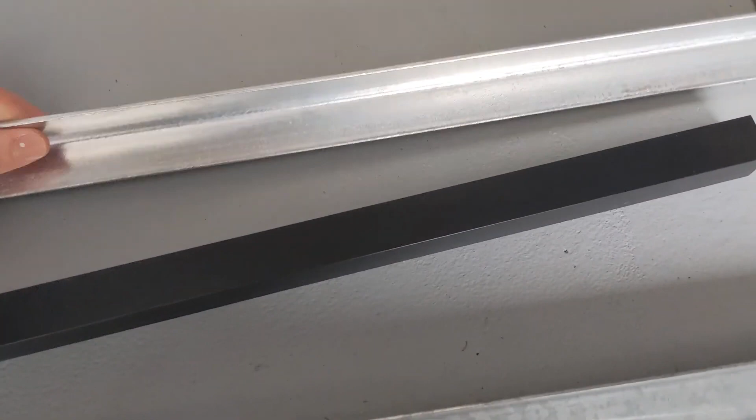So to mount this alley tube to the desk, I've got some angle iron. I was going to weld this, cut it up into little tabs and weld on 2 tabs on each side. But to make it available to more people, I'm going to try to rivet it on and see if that works. I think that should hold enough because it's really not holding that much weight. So more of you guys at home can make this without having all these different tools.

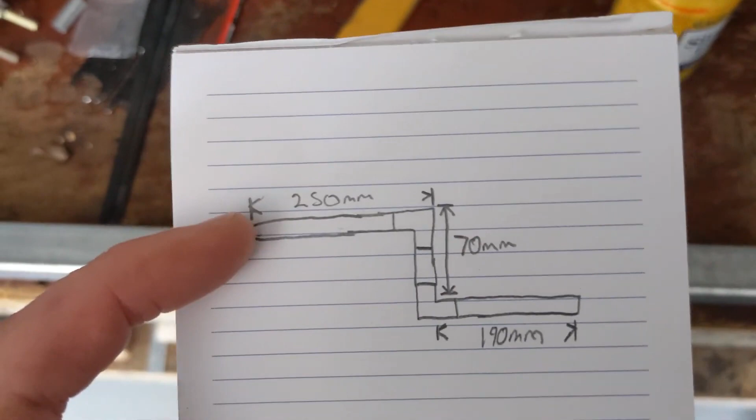So let's start cutting. All right, so here is the design. It's going to come out 250mm total. So we've got to be aware that this is not the length that we're going to cut the pieces of aluminium, because the angle is going to also have length involved.

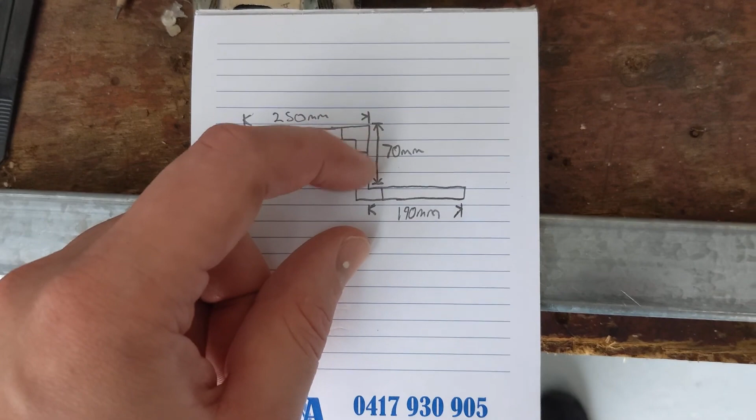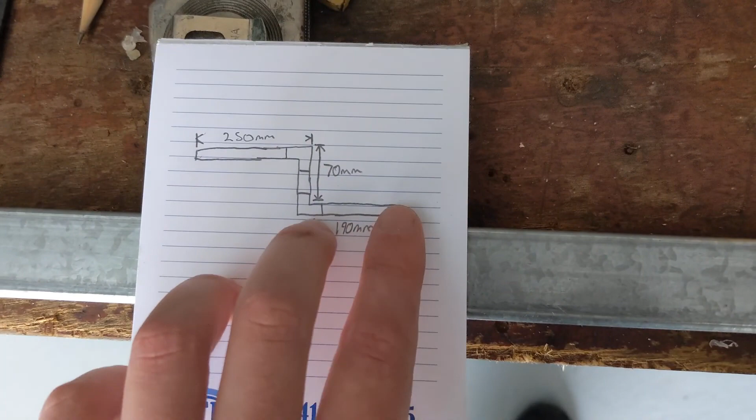Then from basically the bottom of the table to where the joystick is going to mount, I want 70mm of drop there. I think that's quite nice for me. I can always adjust this later, but for now, this is going to be fine. And then 190mm out, which is the perfect width or depth of the joystick. So there's not going to be any little bit of alley hanging out that's going to cut me on my leg. And I'll make a nice little end cap with my 3D printer to just chuck in the end there so it's not going to scratch me.

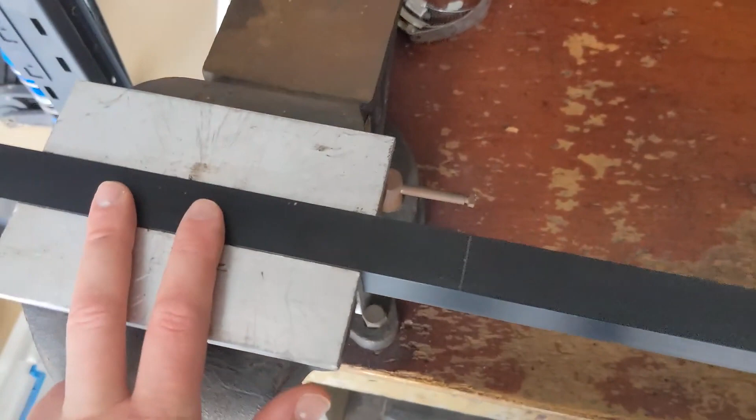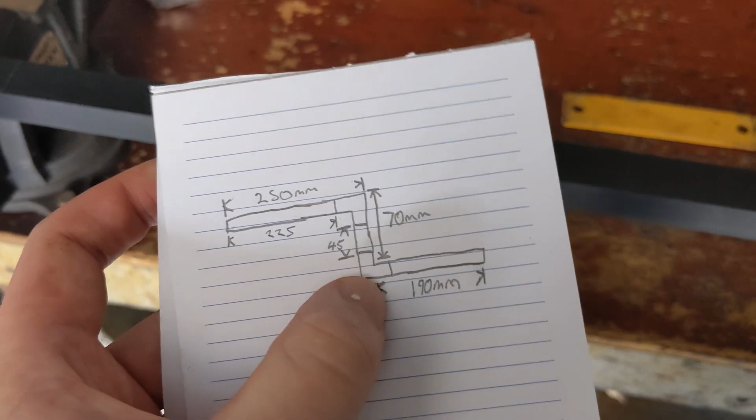So let's clean this bloody desk up because she's filthy, and let's get cracking. Alrighty, so desk is cleanish. Clean enough anyway. And we got the alley clamped in the soft jaws here, so we don't mark anything. Got our first cut marked out, so for everyone playing at home, you can see the actual lengths we're going to be cutting the alley to. So this one's 225 because the corner piece is 25mm long, so we have to take that into account. The other piece will be 45 long, and the lower piece will be the full 190 because these pieces offer the full length of tube, as you can see. So let's get cutting and I'll show you the end result for the alley piece.

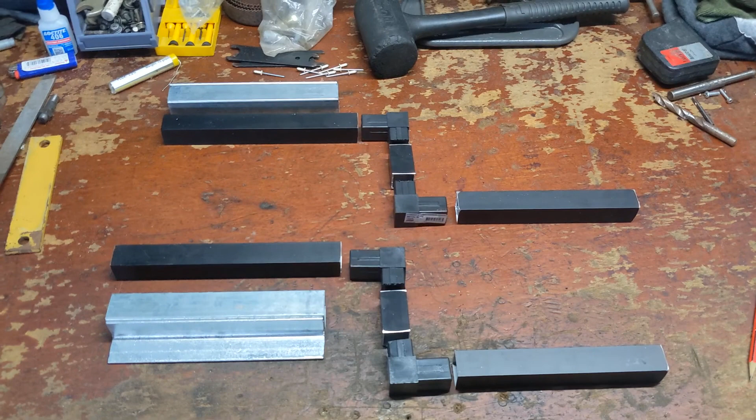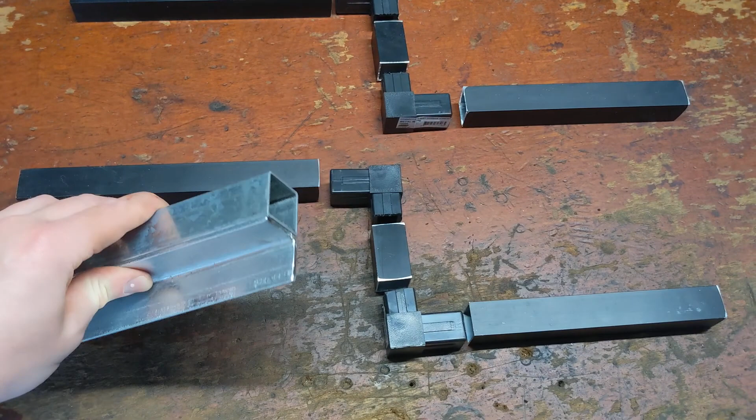Alright, so all my pieces are cut now. I cut all the aluminium with the hacksaw because I don't have a blade to cut aluminium. You can't cut aluminium with a steel type blade. And then I cut these with the drop saw. So these will be the bench mounts. Don't mind my little blood on there. So that will get riveted together, and that's going to bolt underneath the bench. Same goes for the other side.

These are the tubes that are going to slip inside. I think I will actually drill a hole and tack a nut on there and put just a little bolt so it doesn't slip and slide out, but I'll test it and try not to do that because it's just one more thing I got to do. And then for these little angles, I had to cut them down a little bit because this piece is only 45 long, so it's a little bit too short for them to be full length, as you could see. So now I will hammer it all together and show you the test fit.

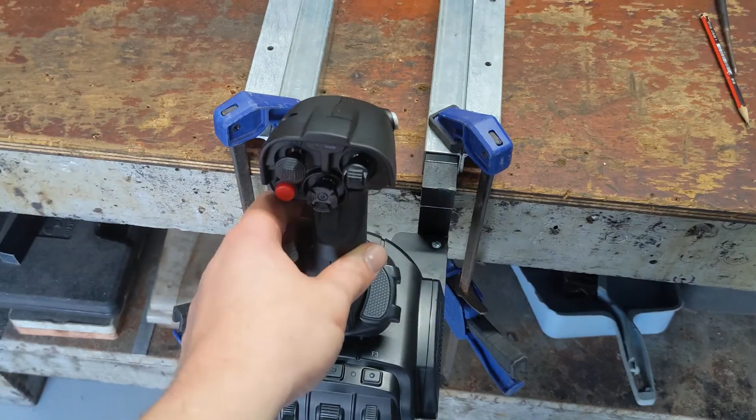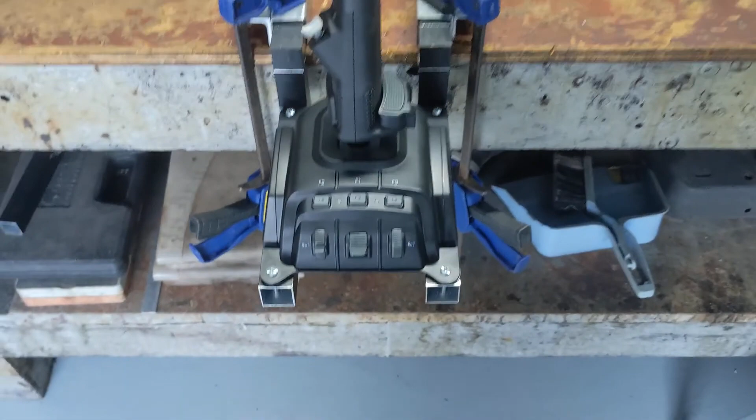Okie dokie, so it is all ready to mount up. So I've just got it clamped to the bench, as you can see. And it's working mint. No movement at all. I thought there would be a little bit of flex, but it's actually solid as a rock, so very, very good. So I'll just 3D print some little end caps to block off here so it doesn't look tacky. And overall, I think it's quite nice.

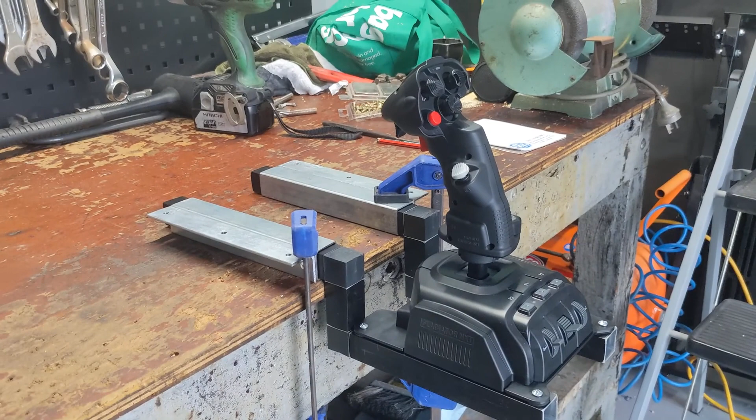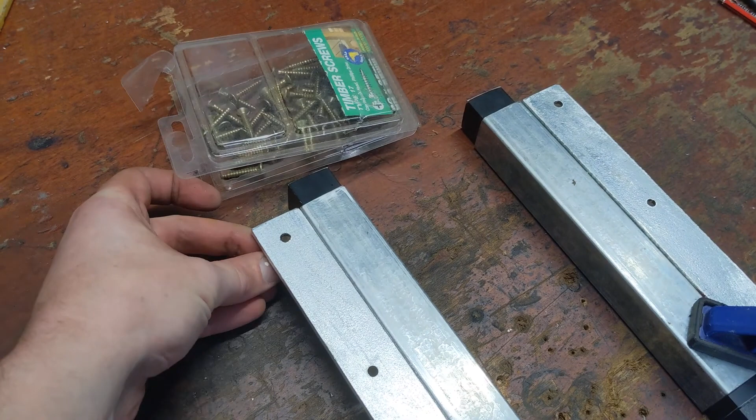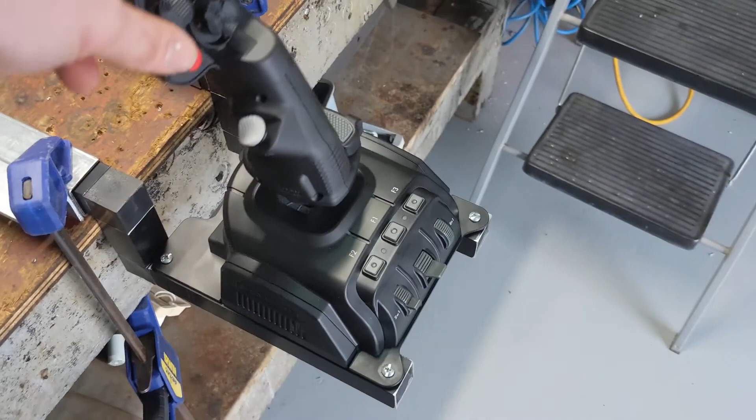So I've pre-drilled the holes for the screws to go in. So I'm just going to use some of these timber screws to go up into the table, like so. And I just screwed this on with some steel sheet metal screws. And yeah, it's quite nice. So I'm pretty happy with that.

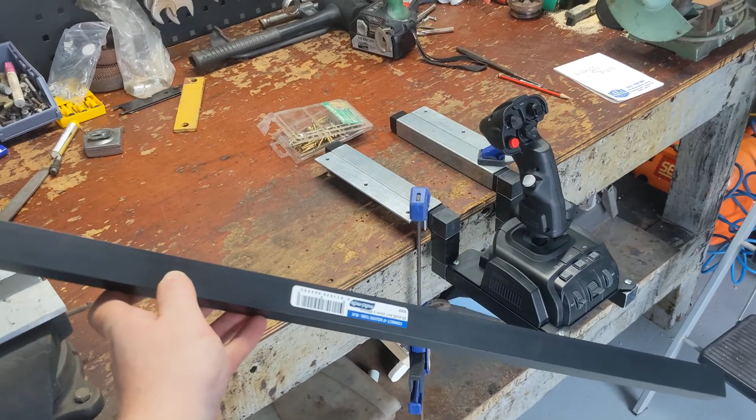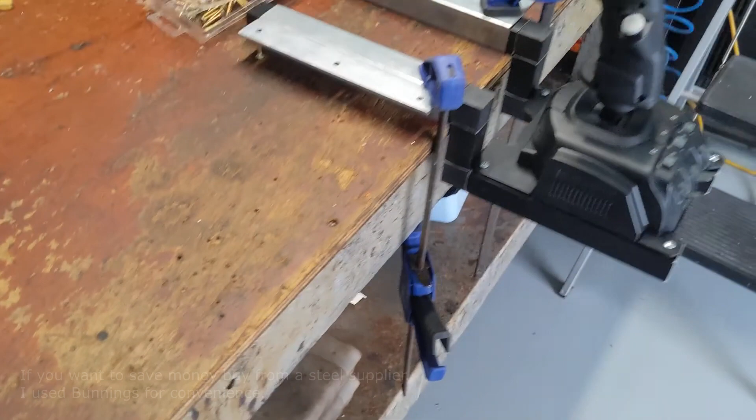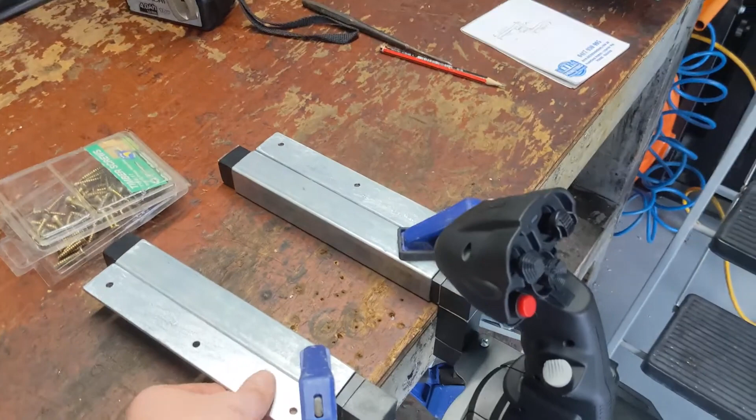All in all, I actually only used 1 and a little bit. So all in all, I used about 1.3 meters of alley tubing, sorry. So really, this was about $40 to make. So quite cheap. And you could have bought less angle iron, less box tube, and make it for maybe $25 to $30. But unfortunately, I can only buy large lengths of this, so that jacks up the price. So let's mount it to the table and test it.

All right, so we have the completed desk mount. It's all mounted. And it works a treat. It is very, very solid. It's got almost no movement at all. And this is with no retaining screws or anything like that holding it in. It's quite tight on the rails, so you can slide it all the way out pretty far. But this is pretty much the position I'll be using it in, nice and close to the desk.

So pulling it out of the rails, that's what you're left with. So not too bad to store away. And then on the desk, you're just left with these 2 box tubes, which when you're normally using the desk, you can't see them at all. You would never know they're there, really. They're not going to intrude on your legs, so it's quite easy.

Now, for the mount, because I didn't intend on using rivets originally, I didn't really take this into account in my design, so I had to file the rivets down a little bit for this to mount into. But it actually makes it nice and tight, so it wasn't intentional, but it actually worked out quite well. So just got to make some of those end caps, but all in all, she's done. So you're probably thinking, hey, you forgot about those 3D printed end caps. Well, I made some, and also some screw covers.